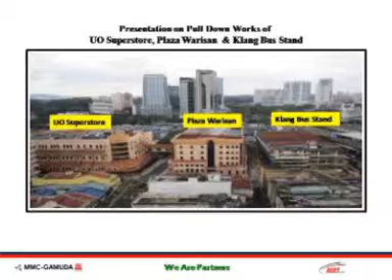For this Pasar Seni MRT station, these 3 buildings mentioned by Encik Haris would have to be pulled down. This is a view of the 3 buildings I'm talking about: the Uda Ocean, Plaza Warisan, and Klang Bus Stand. So I'll give you a general overview of the flow sequence of what we are about to do. The buildings were handed over sometime in November of last year. Then we followed with the termination of utilities, because we must ensure that the water, electricity, all has been cut off.

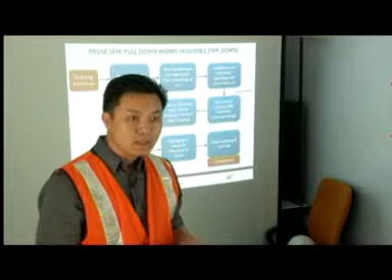Then the contractor will have to go and apply for all the permits to get take down plans, the hoarding, and they will have to resurvey the building. For information, for all these buildings, when we took over, there were no drawings of the building. So therefore, the contractor has to appoint a professional engineer to restudy or re-engineer the building, so that they know what are the steps to bring down the buildings.

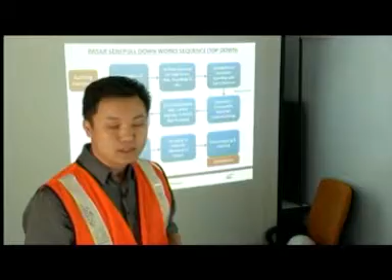So once the plan is in place, the contractor would have to install the perimeter hoarding and catch platform, because when you want to demolish top down, you need to put in this safety hoarding and all sorts of things. Then they will go into the removals, concurrently removal of combustibles, or what you call the soft stripping.

As you know, inside the buildings you have plaster ceilings, you've got downlights and all these things. All these things will have to go to expose the structural slabs. And concurrently, they will also be erecting the scaffolding and internal slab proppings. Once all these safety measures are in place, the contractor would then hoist up the excavator breaker to the roof slab and start pulling down from the roof to the ground.

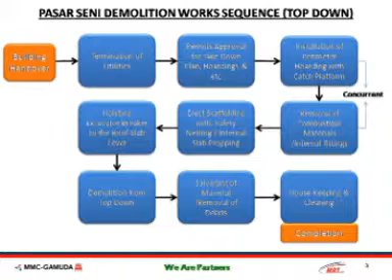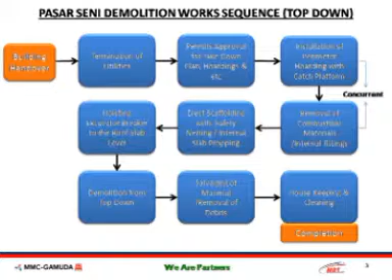This is what I mentioned as the demolition from top down. Of course, during the process, if they can salvage recyclable materials, the contractor will salvage these materials. And as they finish up the work, it's housekeeping and cleaning. So this is a general overview, but I will go into a little bit of the details.

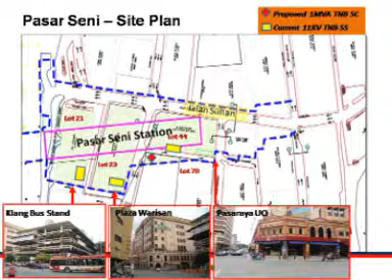Okay, for your information, in Malaysia there is a code of practice for demolition of buildings. So we want to ensure that all the contractors comply with this MS 2318-2010, a Malaysian standard code of practice for bringing down the buildings. You see, in the code of practice, there are samples of the methods envisaged on how to bring about the pull down of the buildings.

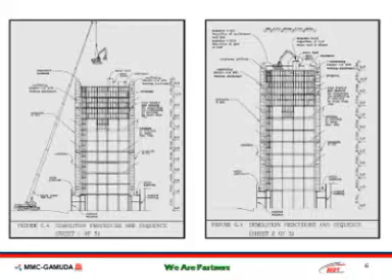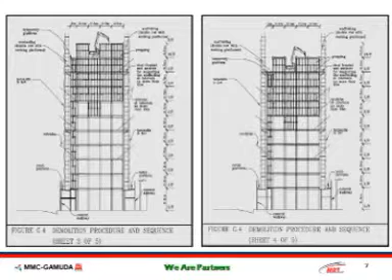For example, safety issues like having these scaffoldings and industrial nettings, all must be in place. The building needs to be propped, because the machine will be sitting on the slabs. And all these have to be calculated and certified by a professional engineer. Yep. This is the sequence. Once you break the roof, you go down to the subsequent slabs, and then all the way down.

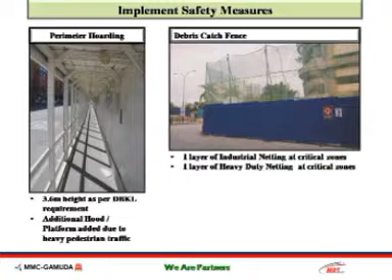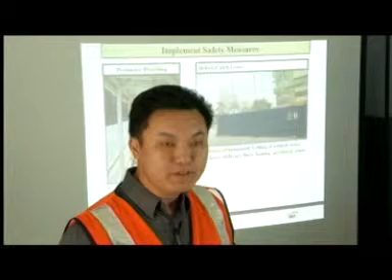So safety measures, we are talking about hoarding, covered walkways for the pedestrians' convenience. You will have things like the industrial netting that not only comes in 1 layer, but the contractor has to provide 3 layers: tarpaulin netting, heavy industrial netting, and this sheeting.

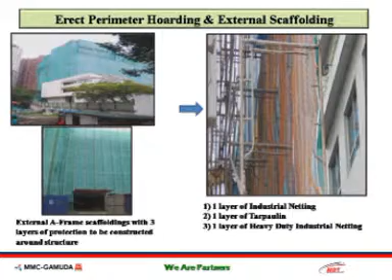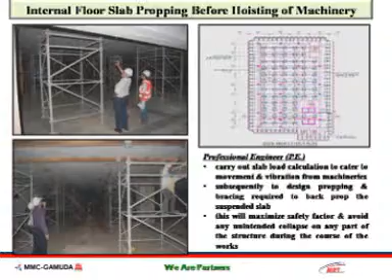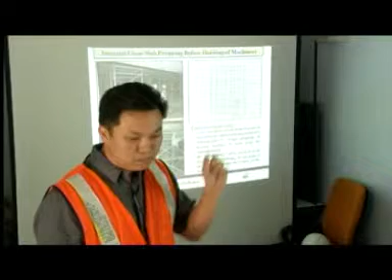Just now I was talking about floor proppings. These are actually pictures taken from a recent project. We are putting this type of heavy duty prop system to prop the building, because you are putting heavy machinery on top. You're talking about having a breaker, a hydraulic machine which weighs about 20 tons sitting on the slab, so it has to be calculated. And these are examples of floor plans where the placement of all the props is certified and calculated by the professional engineer.

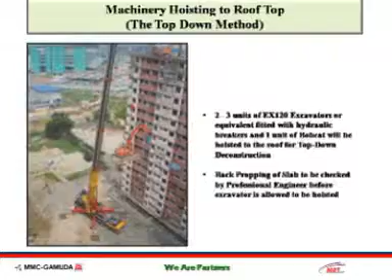So this is a slide showing that once the contractor has done all the safety propping, only then do they bring an excavator hoisted up to the roof, together with a bobcat, and start breaking the slabs. As I mentioned, back propping is to be checked by a professional engineer before the excavator is allowed to be hoisted.

Work sequence. Physical hacking works will be carried out on a floor-to-floor basis, starting from the slab, then you go into the beams, and finally the columns. The excavator machine will be lowered down using this type of ramp. It's a steel ramp so that it can start to march down to the lower floors.

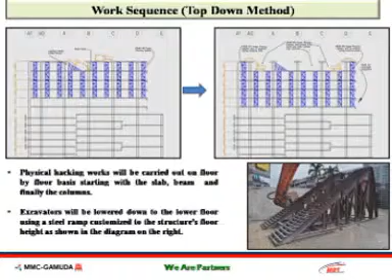Okay, as soon as the building is brought down to a manageable level, which we think is less than 3 storeys, things will be done in a different manner. They will put the machine on the ground floor, then use a long arm excavator, about 20 footer or 40 footer, and break the slabs from the ground. One good thing is there is better control because you can have more machines sitting on the ground. Then it will be a quicker method to bring down the building.

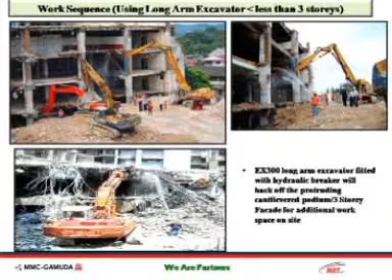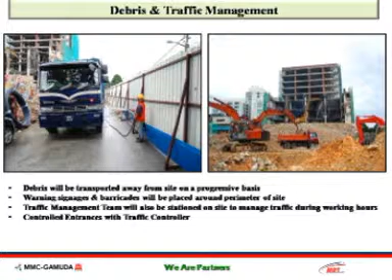In terms of debris and traffic management, paved, stabilized access will be in place to control the ingress and egress of lorries, and you have a general worker to ensure that the wheels are washed. We do not foresee any silt because these are purely concrete debris. It's not like what you see in earthworks with a lot of mud. It will not have that kind of scenario.

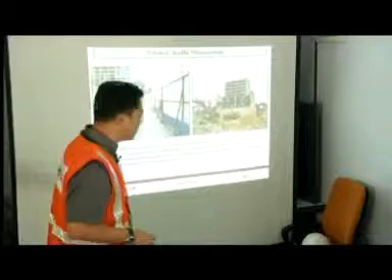Then there will be a traffic management team. The contractor has appointed a professional traffic management team to oversee the traffic during the ingress and egress of the lorries. All right. So basically, this is the presentation material on the pull down of the buildings. Yeah.

Haris. So, okay, thank you, Alvin. Yep. It's just a bit tight, so walking back and forth.

What we'd like to do right now is to open it to the floor for any questions, and anything that we can answer, we'll take. Anything to do with Dana Infra is not us, yeah? So whatever you see in the papers today on Dana Infra, we can't answer that. But anything else related to the topic at hand today, we'll take on. Yeah? Any questions? That was an interesting presentation. Any questions at all?